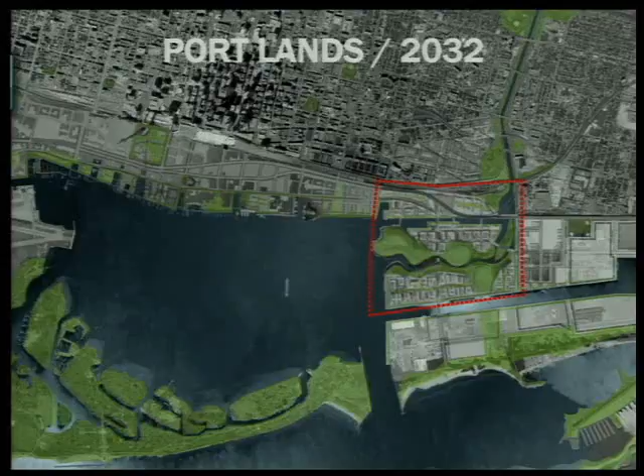Would have been impossible. And it essentially involves moving the river out of its current course, creating a new estuary where the Don River comes into Toronto Harbor in the middle of a 100-acre park system. Again, that principle of doing multiple things and at the same time solving this major floodproofing problem.

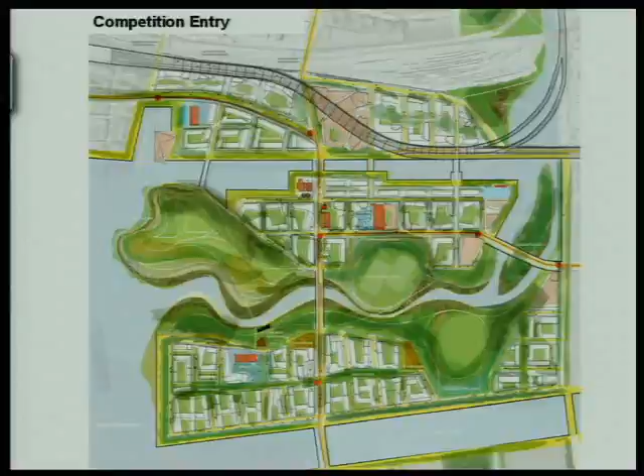So this, after a couple of months' work, was the competition entry that we submitted. Obviously, there's only so much information you can convey in a competition brief, and this was in 2007. We've been working ever since on the evolution of the plan. And at this point, we're absorbing in much greater detail all the information to make this real.

And I've simplified it here by just showing these 5 layers. In fact, there are more layers than that. It's keeping all these balls in the air, understanding all the issues related to public realm, circulation, built form, microclimate, neighborhoods, meaning development. In fact, we're going to be housing 25,000 people here and 10,000 employees on this site, and understanding all those interrelationships. And so this is just a few different ways of understanding the site.

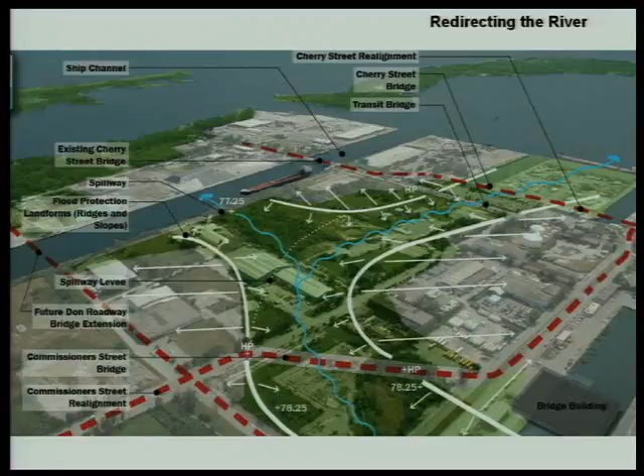This is an image about the behavior of the river, the way in which it behaves both regionally as the end of a great watershed through the region going beyond municipal boundaries, and also locally in terms of its interaction with the surrounding urban fabric.

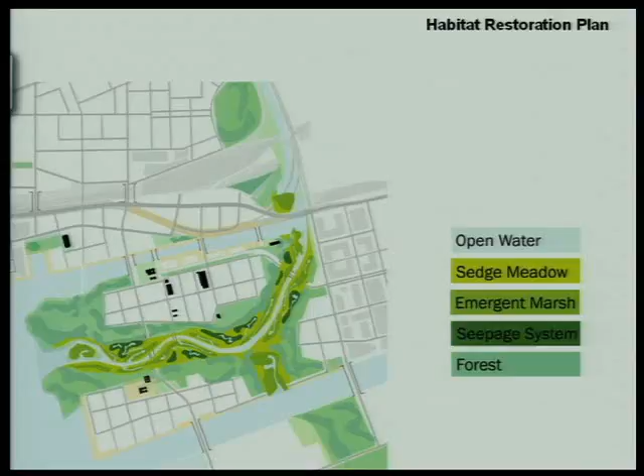This is as an ecologist would see it, with the ecotones that are produced along the river, the different kinds of natural environments, and the way of keeping these alive through a combination of harvesting stormwater from the urban areas, lake water, and the water which is coming down the river itself. This is the kind of environment that can be created in the heart of our city, and this whole theme of reconciliation of the urban and the natural worlds is one which is very, very strong in my work these days.

This is seeing the same thing socially in terms of how this new set of neighborhoods would actually relate to an existing set of neighborhoods and all the uses and activities that are going on in these. Some of these are emerging neighborhoods, some of these are well-established existing neighborhoods, some of them are former industrial neighborhoods that are actually recycling, where the local economies are changing. Things like Filmport, which is a major set of new sound studios that's just been built, introducing a whole new set of relationships. So understanding what all these interactions are. This area, 325 acres, is large, but it doesn't exist in a vacuum.

This is this kind of mantra about 21st century neighborhoods, the ability to respond organically, to develop, to deal with a whole set of uses at transit supportive densities, to in fact replicate an understanding of how cities grew organically in the past.

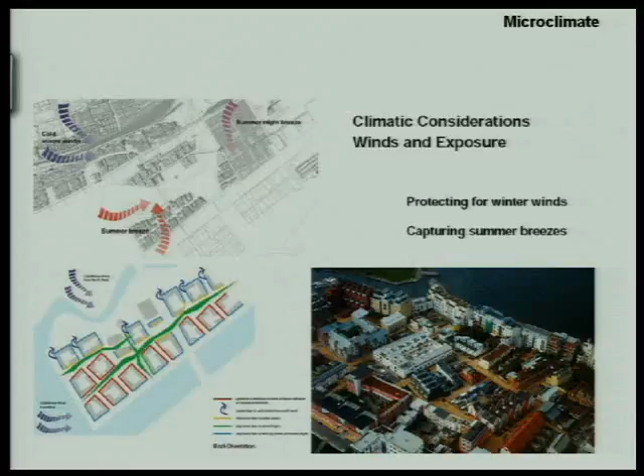This is yet another aspect, microclimates. If we want the world to be such that people are walking and using transit in an exposed site like this, we have to be able to produce environments which are protected from the wind. The illustration there is from Malmö in Sweden, a similar northern climate where the buildings have been very effectively organized to provide that kind of wind protection.

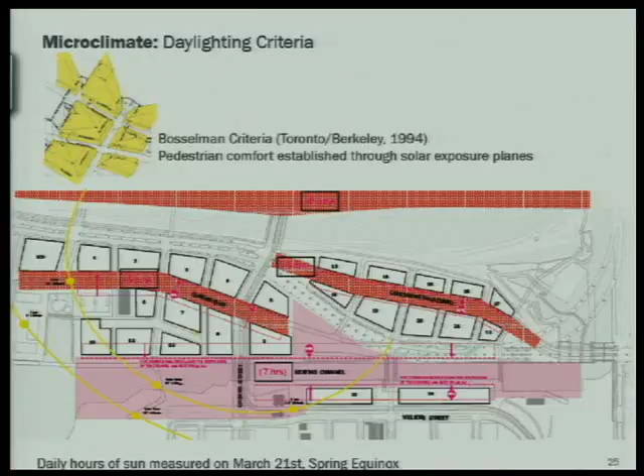This is solar penetration, hours of sunlight on the public spaces, the river and the Keating Channel, which is the historic artifact from the engineered river, and being able to model in very sophisticated ways how the urban fabric can be contoured in order to privilege the penetration of sunlight. And in fact, some of this finds its way directly into zoning ordinances where we mandate performance related to hours of sunlight in particular streets and public spaces, and this gets tested as buildings come forward.

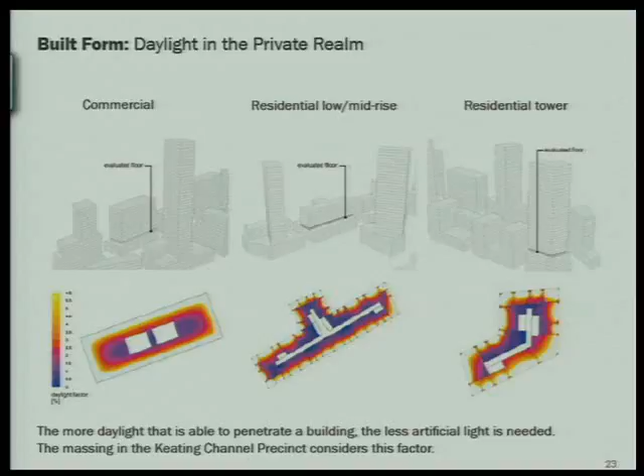It extends into the performance of buildings themselves, less energy consumption. So one of our consultants was Transsolar from Germany, who are specialists in some of the new sustainable technologies, and we got into issues of configuring the blocks in the plans so that the distance from window wall to core or window wall to corridors was such that we could get more natural light into buildings, both commercial and residential, and reduce the consumption of electricity.

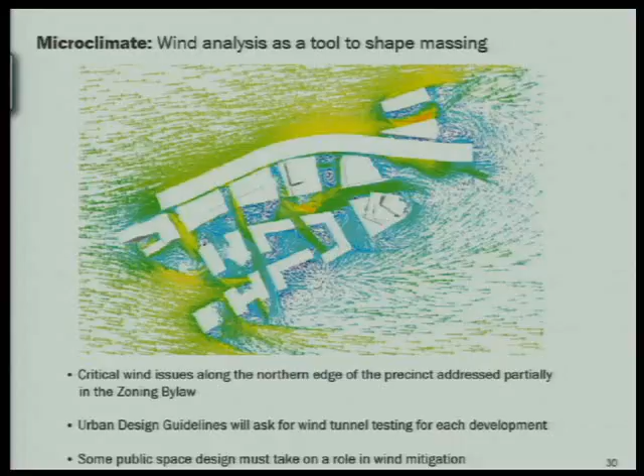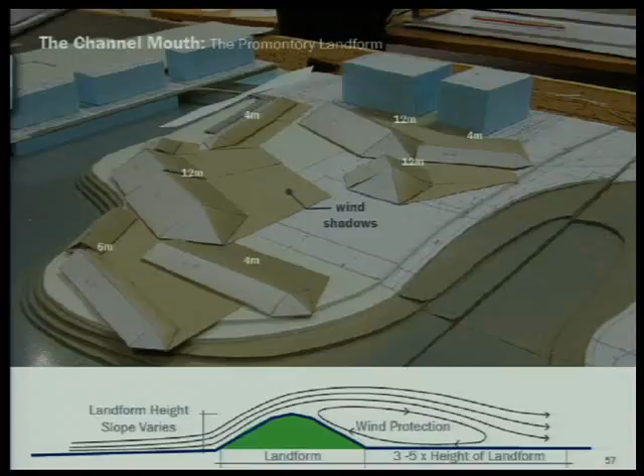This going back to winds, there are many ways to solve these problems, and some of the things we do at a neighborhood scale, for example, looking at, as they did in Malmö, at the overall pattern and creating, in effect, a kind of built-form overcoat for the neighborhood that would protect it from the prevailing winter winds. These are some techniques in the landscape that would start to do the same thing, and ways of actually configuring the landscape so that through this use of topography we could create areas in the lee of these winds that would actually be protected at certain times of the year.

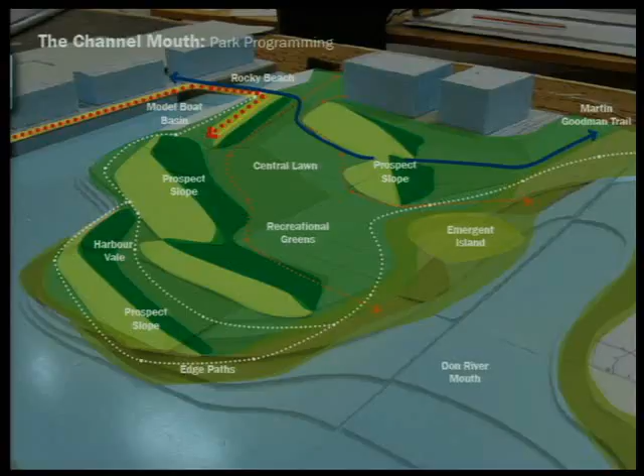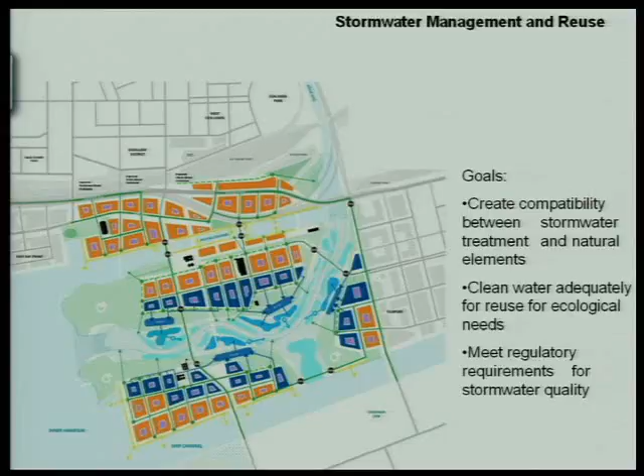And then beginning to translate this, this is with Michael Van Valkenburgh, noted landscape architect, who is my colleague here, into ways of shaping the landforms to achieve this. Harvesting the stormwater from the buildings for multiple purposes, both to feed the perched wetlands along the river, but also to provide irrigation for the trees in the neighborhood, the street trees.

And out of all this comes the notion of a kind of neighborhood DNA, the conditions and properties that you want to have in every module of the development as it goes forward. Each phase would have a combination of certain amenities, certain services, access to transit, a portion of the public realm, all of those things which would be replicated over and over in different ways rather than waiting for an end state for these qualities to appear.

This blending of targets, the ratio between people living and people working on the site, became extremely important, and to do that we really needed to understand the market conditions in the Toronto local economy, not just the site itself, and how this would impact and be impacted by that larger set of conditions.